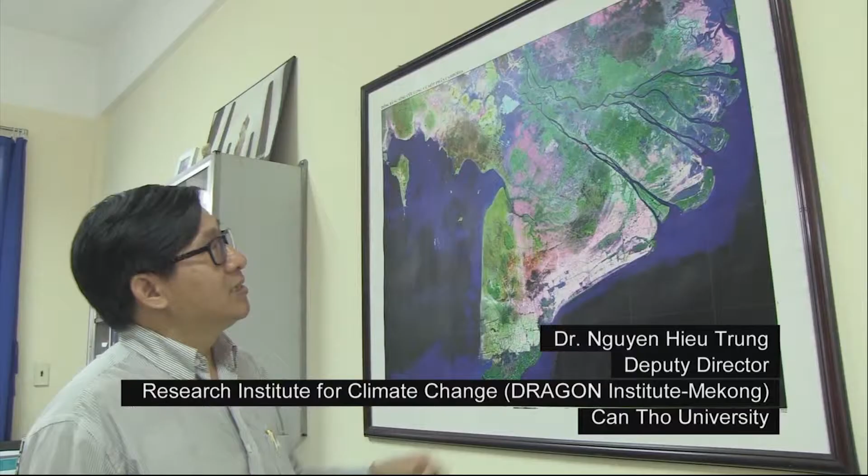As the largest city in the Mekong Delta, Can Tho was built around its water-based deltaic landscape. However, this culture that has traditionally lived with water is being increasingly disconnected from it. What if we were to reconnect the movement and flows of the urban hydrological cycle to the city of Can Tho and its people? The city is growing very fast.

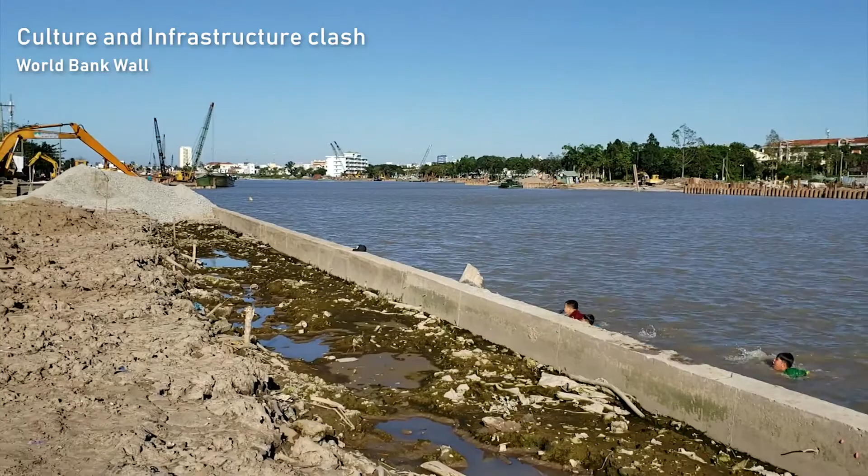During the rainy season, from May to November, Can Tho is flooded twice a day. This flooding is due to high tides combined with river discharge, as well as high rain volumes from the monsoon season.

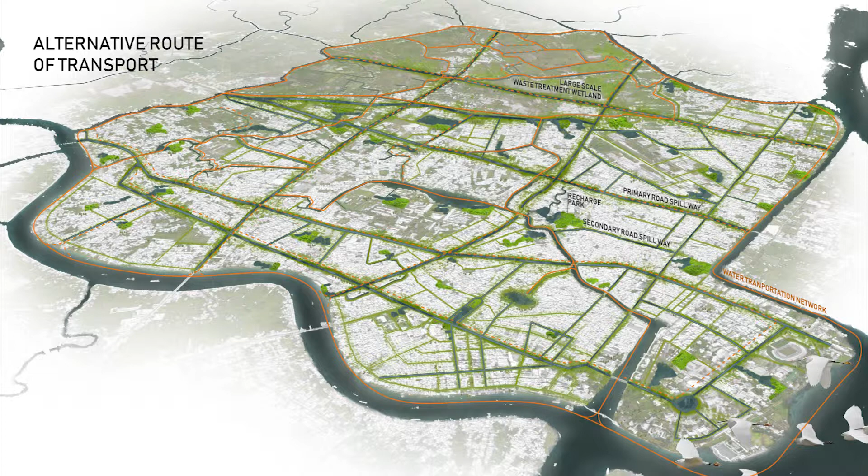The scale of this problem requires a citywide strategy. Reflow Can Tho is a proposition to use the existing city fabric to address current and future urban stresses. In order to allow water to move more easily through the city, Reflow will utilize existing roads to create a network of spillways throughout the urbanized core. To allow for safer interaction with the urban waterways, Reflow will completely remove the sewage discharge from the canals through a distributed system of constructed wetlands.

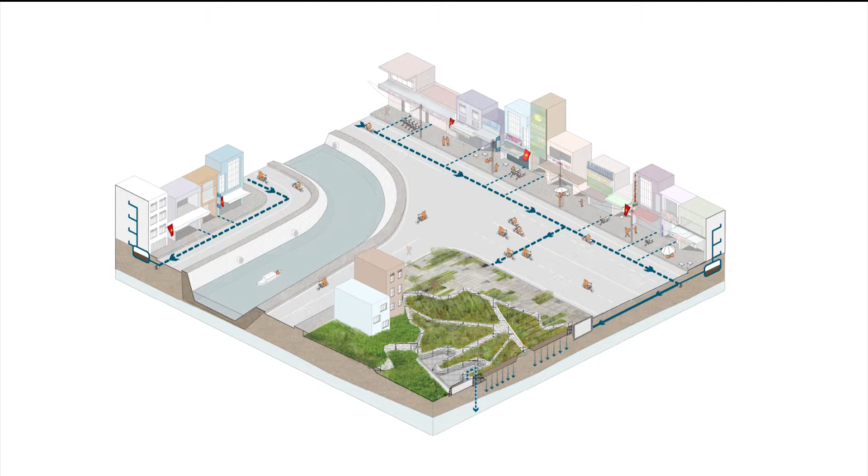In the existing system, untreated sewage flows directly into the canals. By introducing recharge parks with biofiltration and rerouting the city sewage network, we can not only clean the waste, but also recharge depleted aquifers, reducing subsidence. By greening streetscapes and canal edges, more of the excess water can be displaced back into the ground, and overflow can be taken by low-lying basins.

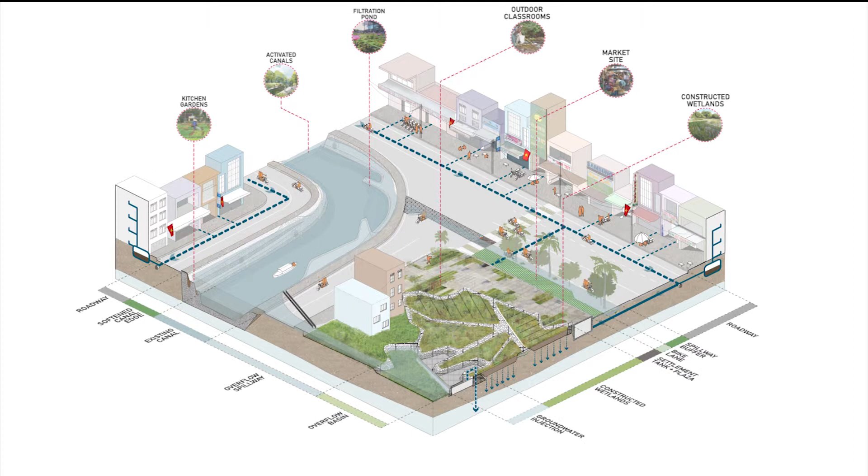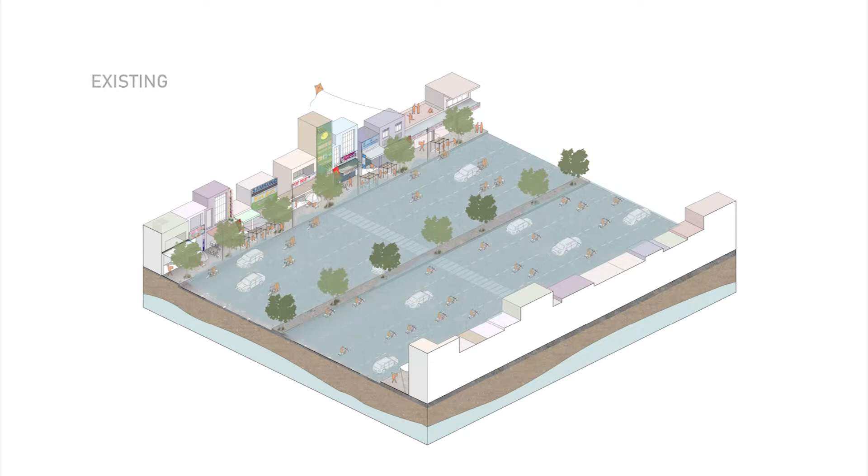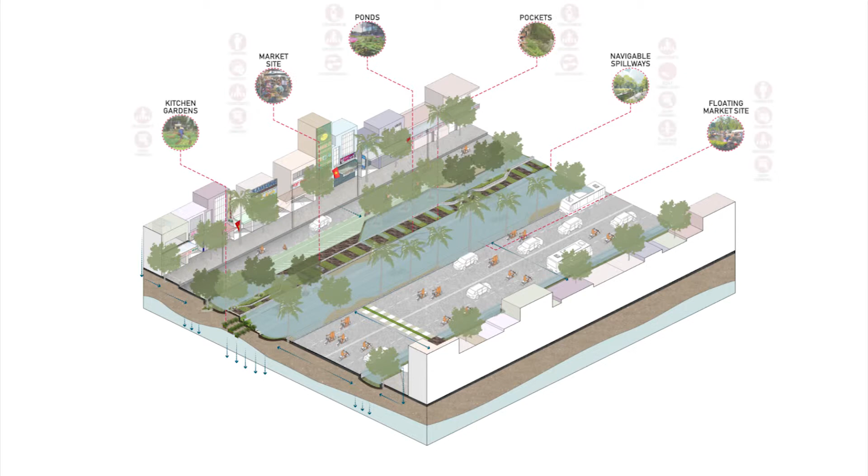To deal with increasingly regular seasonal flooding, Reflow proposes creating a network of spillways through existing overbuilt 6 to 8 lane roads. During the dry season, the spillways act as a linear greenway, bringing life and activity to the city streets. When the monsoons arrive and the tide rises, the spillways absorb water which would normally flood the surrounding streets. This will allow for water to more easily move through the city and rainwater to be held and released over time.

By reconnecting Can Tho to its deltaic roots, we can not only reflow hydrological cycles and waste, but reflow people's daily lives, reimagining a lost connection to the water and the surrounding landscape. Reflow can be a model for growth not only for Can Tho, but for increasingly urbanized deltaic landscapes around the world.